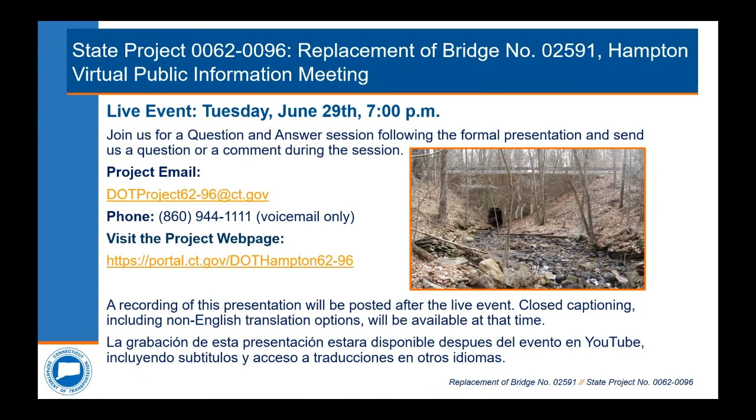My name is Kevin Blasi and I'm the project manager for the project being presented this evening.

On May 13th, 2021, our project team presented this project to Hampton First Selectman Alan Cahill. Along with the details specific to the bridge, we discussed the proposed detour and the project schedule. We also discussed the coordination that will be necessary with neighboring towns to ensure that quick emergency responses are maintained during the bridge closure period. Coordination with the town will continue as we advance the project through its design.

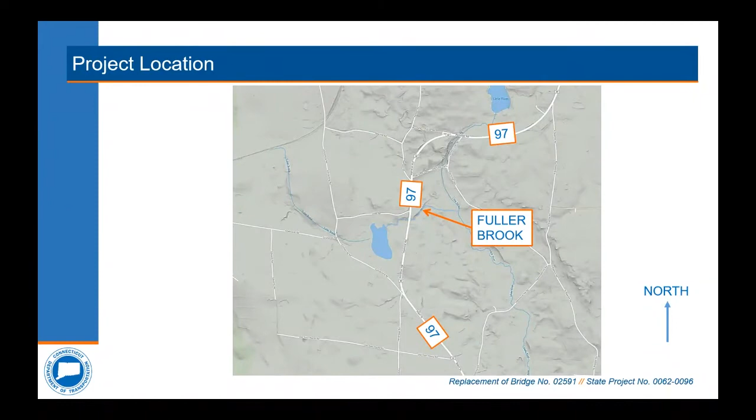Shown here is a topographic map of the area with north at the top of our screen. The bridge site is circled in orange, with important roadways and riverways in the area also called out.

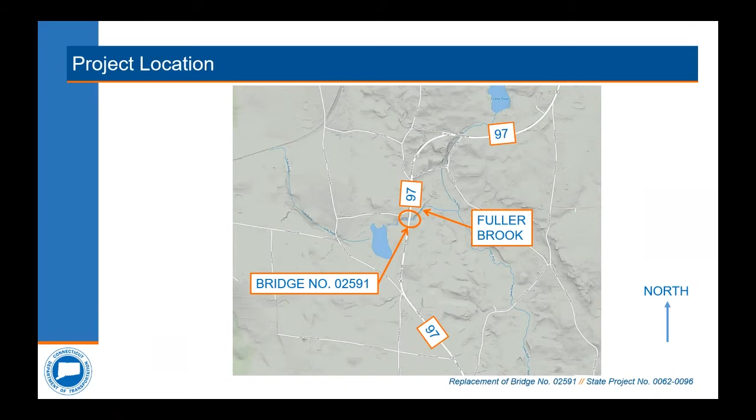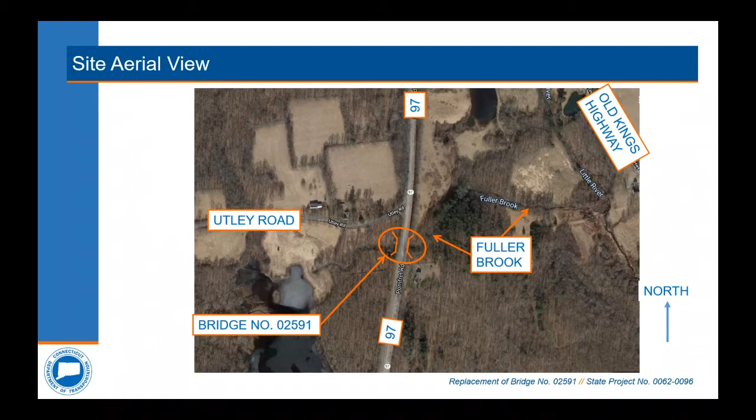Here we have the project site aerial view, again with north pointing to the top of the screen. You can see that we're further zoomed in to see the nearby features and roadways that make up our project site. Fuller Brook passes under our bridge, and Utley Road connects from the west to our north-south running Pomfret Road, otherwise known as the Connecticut Route 97 roadway.

The existing single-span culvert, otherwise known as a tunnel for a waterway, was built in 1935 as an 8-foot tall by 6-foot wide archway that was lengthened to the east at an unknown date. This culvert lengthening was due to raising as well as widening the roadway for various reasons. The newer part of the culvert is a 6-foot tall by 6-foot wide square outlet, which is built from masonry abutments with a concrete deck slab supporting the hillside above.

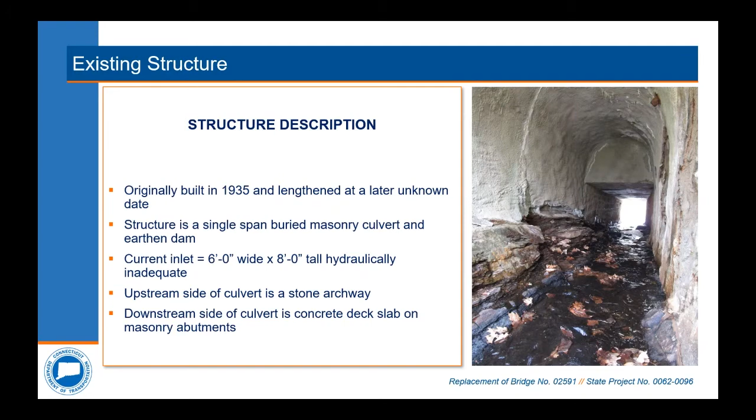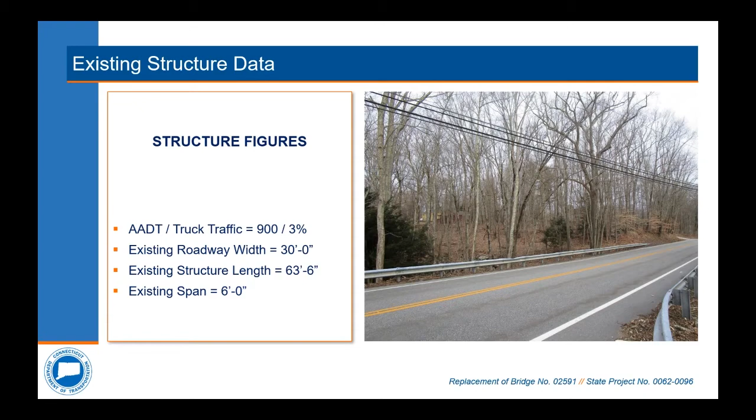The small culvert opening is not sized to convey the full flow of a 100-year storm event. The existing structure's span is 6 feet with a length from inlet to outlet of approximately 63 feet 6 inches. The roadway is about 30 feet wide and holds 2 lanes of traffic running north-south. The roadway serves approximately 900 vehicles daily, with around 3% of that traffic being trucks.

The state's bridges are inspected biennially to monitor changes in condition. The bridge was last inspected in February of 2021, and the rating system on screen presents the element ratings for the deck, superstructure, and substructure. These elements are rated on a scale from 1 to 9, with 1 being imminent failure and 9 being excellent.

Bridge 02591 is mainly comprised of 2 parts: the superstructure, which is the part that actually does the bridging from one side to the other, and the substructure, which is the part of the bridge that holds up the span itself. The superstructure is rated as a 4 of 9, which qualifies as poor, and the substructure qualifies as a 7 of 9.

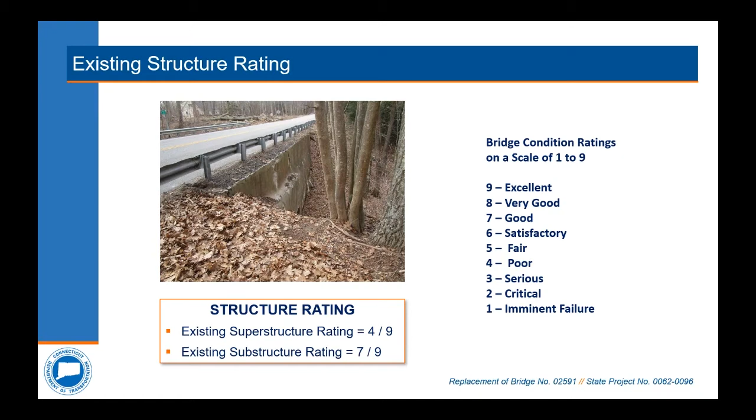Only when the bridge drops to a poor condition rating, 4, does it become a candidate for a rehabilitation or replacement project. We would like to clarify that the bridge is structurally sound and remains safe for all passenger vehicles and trucks at this time, and poses no safety concern to the public.

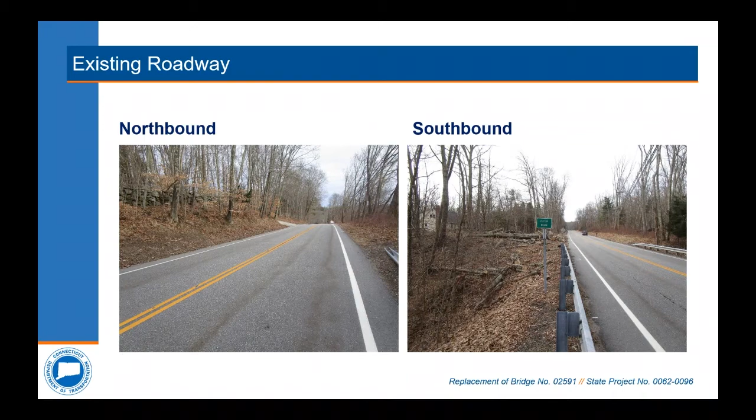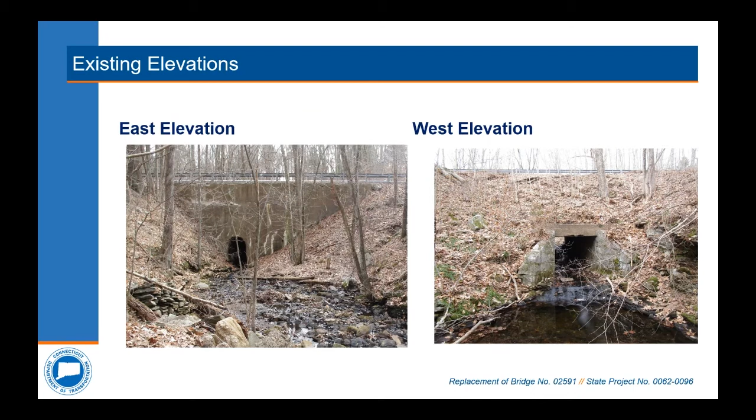The east elevation, shown on the left, is the inlet side of Bridge 02591. Note that the inlet is built into a large retaining wall that supports the roadway. The west elevation is on the right side of our screen, in which the outlet of the culvert dumps into a 3-foot deep scour pool seen at the base of the structure. This natural feature, as well as other structures in the waterway, both upstream and further downstream, inhibit fish movement in the area.

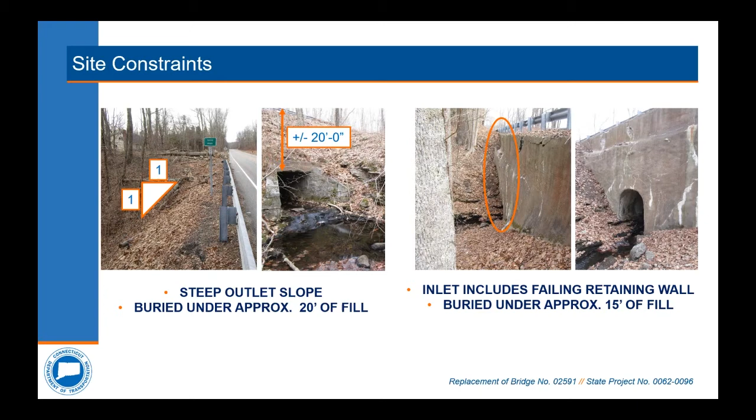This site is riddled with constraints, making the design a real challenge when looking at accessibility. The existing downstream culvert slope is at a 1-to-1 grade from the northbound travel lane shoulder down about 20 feet in elevation to the ceiling of our culvert outlet. On the inlet side, a heaving and non-square natural stone retaining wall buries the culvert with about 15 feet of fill below the roadway. The depth at which this structure is set, as well as the surrounding steep slopes in the area, pose a great challenge to the feasibility and constructability of this project.

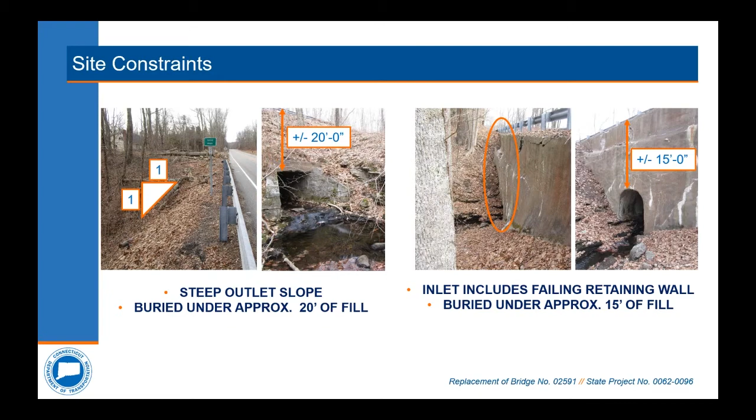The existing inlet retaining wall appears to be natural stone covered in shotcrete. The wall appears to be heaving and is covered in peeling shotcrete with major cracking throughout the face of the structure.

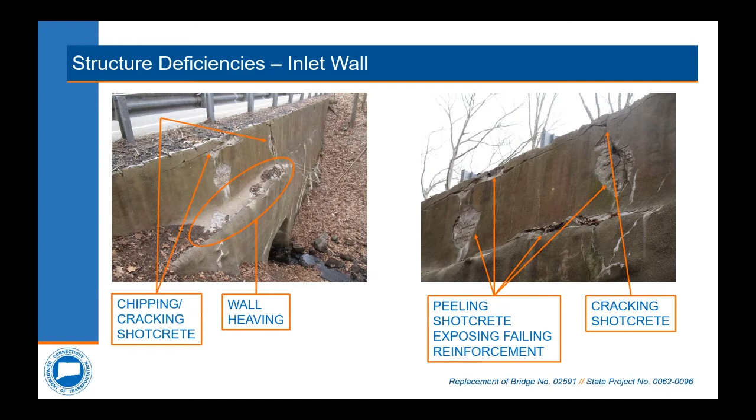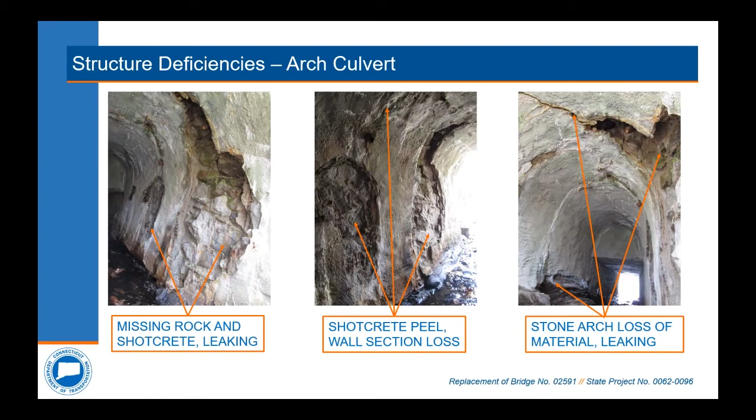At the base of our inlet retaining wall, the archway can be seen here, missing critical sections of material, thus allowing large amounts of water to leak into the culvert from above. This prolonged leaking further erodes away more of the structure as time goes on, making the archway weaker.

The newer frame downstream of the archway of the culvert shows evidence of scour underneath the abutments, which means water is eroding away at the base of the walls. The ceiling deck is also cracking and exposing rusted rebar.

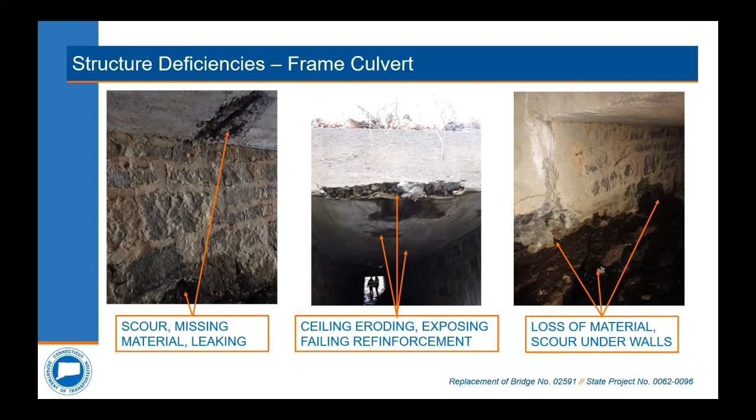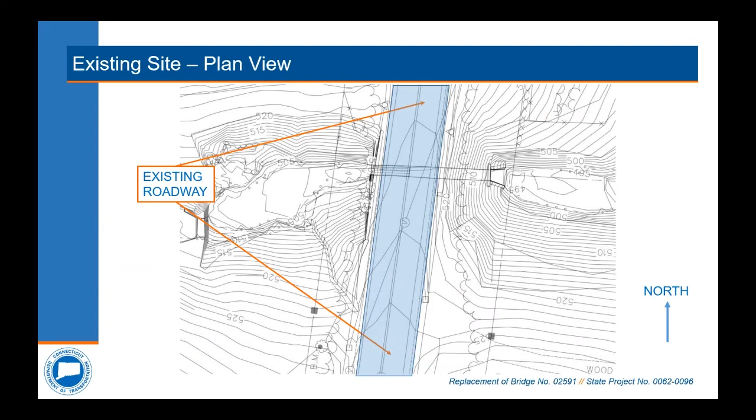We were able to obtain a 3D site model by completing a site survey. Running from north to south across the screen, we can see Pomfret Road here. On the left, or inlet side of the roadway, we can see the retaining wall highlighted here. Running perpendicular under that roadway is the existing culvert shown here.

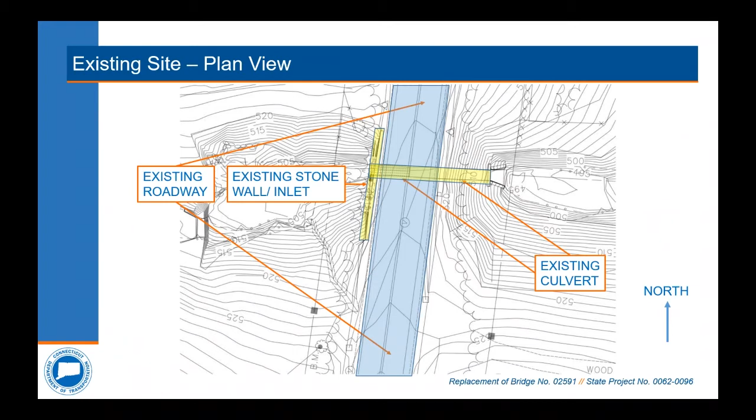At the end of the culvert, we have the outlet on the east side of the roadway shown here. The proposed conditions we intend to meet for the site are putting in a larger culvert that's slightly realigned and lengthened to better handle the stream load, as well as eliminate the need for a retaining wall on the inlet side to save cost on the project.

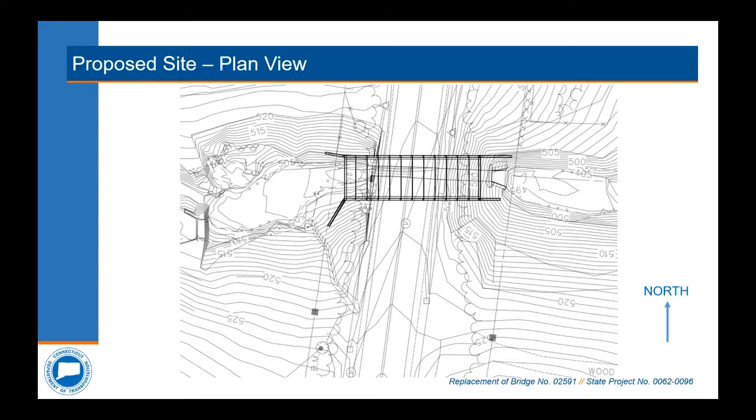The proposed culvert design is approximately 5 times the opening size of the current culvert and is shown here. We next aim to put in larger wing walls at both the inlet and outlet to act as retaining walls and hold back the surrounding hillside shown here.

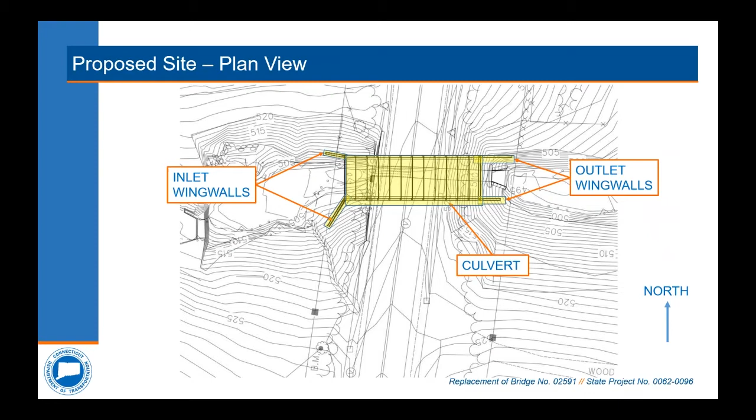We want to restore the roadway to similar conditions shown here that currently exist on site, but just have slightly larger shoulders along the roadway for safety considerations.

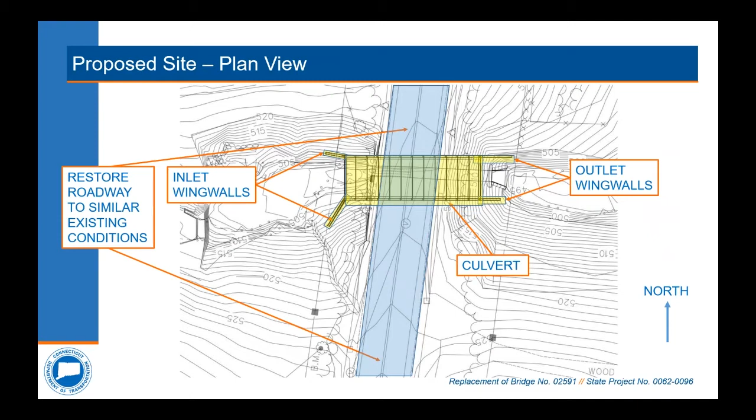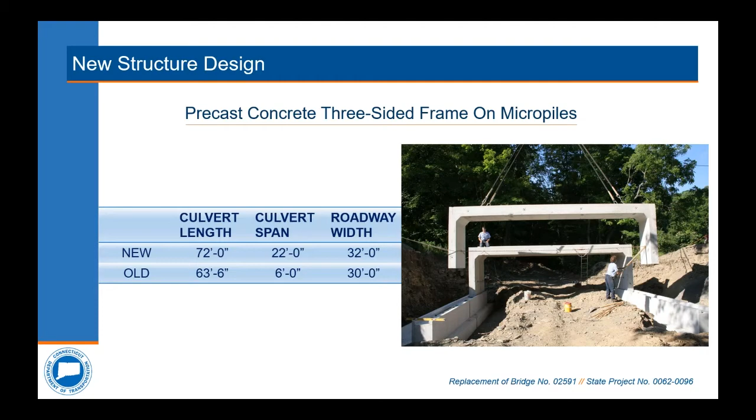It will sit atop a foundation made of micropiles and pile caps, which is a common foundation style for deep and rocky excavations like we expect to have with this design. The new culvert will be approximately 8 feet 6 inches longer and 16 feet wider than the original culvert.

In order to complete this project, we will need to temporarily move the overhead utilities to a location that will accommodate construction activities without conflict. There are no underground utilities that will require temporary relocation.

We also need to consider resident overhead utility relocation because an access road will be placed in the southeast corner of the site where a current residential utility hookup lies. The intended goal of the overhead utility relocation is to keep them all on one side of the bridge upon its completion for potential ease of future maintenance in the area.

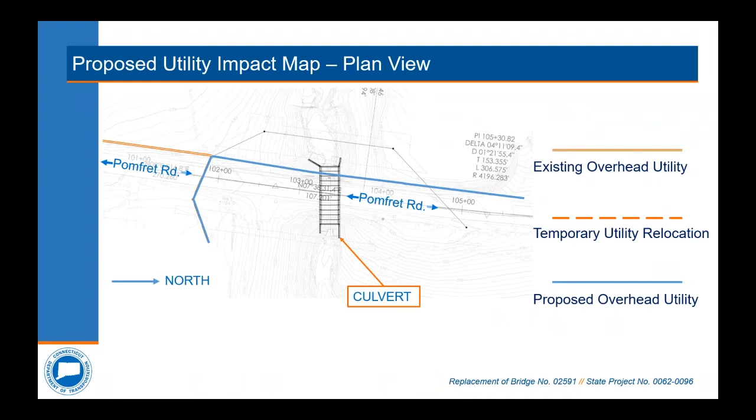While relocating these overhead utilities, it is clear that land outside of the state right-of-way will be required. Therefore, temporary and possible permanent impacts to private property will be necessary to complete this bridge replacement. The areas that are expected to be impacted are shown here and will need to be cleared of vegetation.

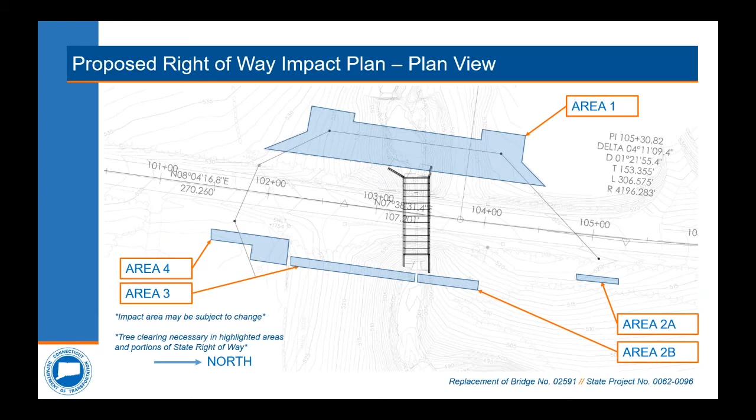I will now hand the presentation over to our DOT Rights-of-Way Coordinator, Matt Giannakopoulos, to help explain this acquisition process.

My name is Matt Giannakopoulos, and I am a project coordinator with the department's Division of Rights-of-Way. It is our office's responsibility to acquire the property rights needed for transportation projects. The proposed project design requires the acquisition of property rights, so I'd like to give a brief overview of the department's right-of-way acquisition process. Please keep in mind, though, that the specific impacts are still being fine-tuned and may change as the design progresses. Any property rights that will be required will be acquired in accordance with Connecticut General Statutes Sections 13A-73 and 13A-98E. Whenever there is federal money used in any aspect of a project, the department must adhere to the Uniform Relocation Assistance and Real Property Acquisition Policies Act of 1970, as amended.

Once the design has moved to the point where we are ready to begin the acquisition process, each affected property owner will receive a formal letter of intent to acquire from our office, along with a property map which depicts the exact property rights to be acquired.

At that point, our office will determine the fair market value of those property rights and use that value to establish an offer of just compensation.

That offer will be sent out to the property owner in writing, and a right-of-way agent will be available to meet with the property owner and explain the project, go over the specific impacts to their property, and explain the state's offer. The property owner will have a reasonable time, typically at least 30 days, to consider the state's offer and enter into negotiations. If an agreement is reached, the state will prepare all the necessary paperwork and record the deed and the property map on the town land records.

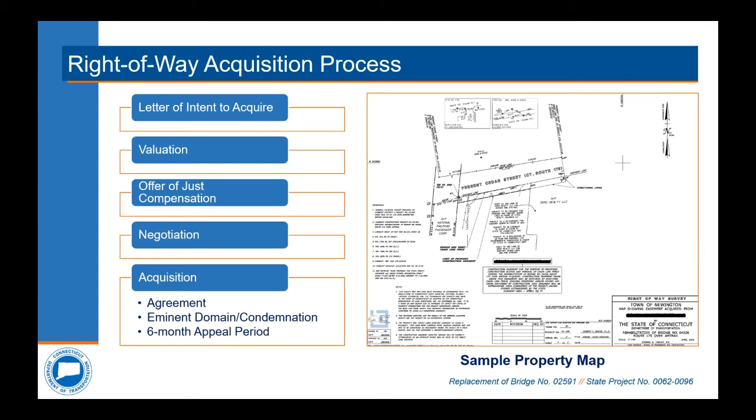In conjunction with the wall demolition, the culvert will also be carefully removed so as to cause minimal to no disturbance to our stream bed.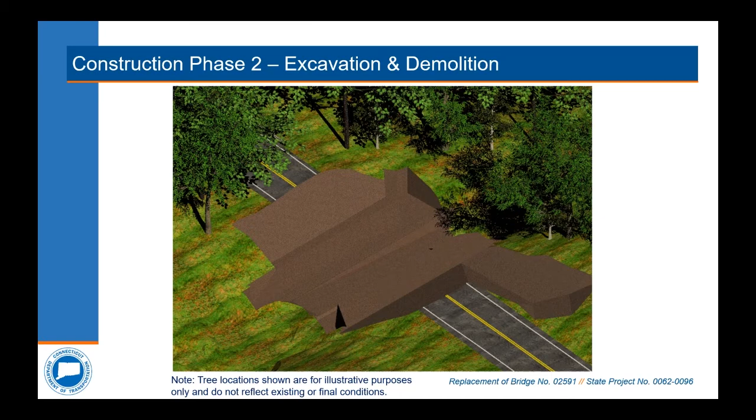Phase 3 is our construction phase of the new bridge 02591. After the excavation has been completed, all foundation elements as well as the culvert precast members will be transported to the site and with the help of a crane be hoisted into their new place.

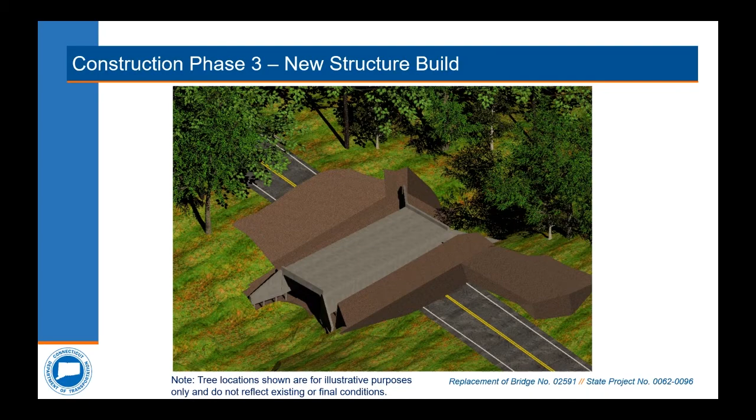The new culvert will sit a few feet higher than the original so that it will be closer to the roadway surface. This will aid in saving time when constructing the culvert as well as make future maintenance a smoother operation all around.

The new culvert will be backfilled after its installation. It's expected that some of the excavated soil will be suitable for reuse as backfill.

After the backfilling process of the site is complete, the utilities will be then relocated to their final condition as previously shown. Reconstruction of the roadway, planting of the site, installation of guide rail, and line striping will complete the project work. Upon completion of those tasks, the bridge will be ready to reopen for use.

Because of site constraints previously noted, it's not possible to keep traffic moving through the project site during construction of the new structure. As such, Route 97 must be closed to permit the necessary operations for the installation of the culvert. The proposed detour will be signed along state routes to minimize the use of local routes by through traffic.

It is expected that local residents will use local roads as a shorter route around the bridge closure. While the closure is in effect, local roads will not be signed as part of the detour. Our proposed detour is approximately 21.39 miles, mainly comprised of four roadways: Route 97, Route 6, Route 169, and Route 44.

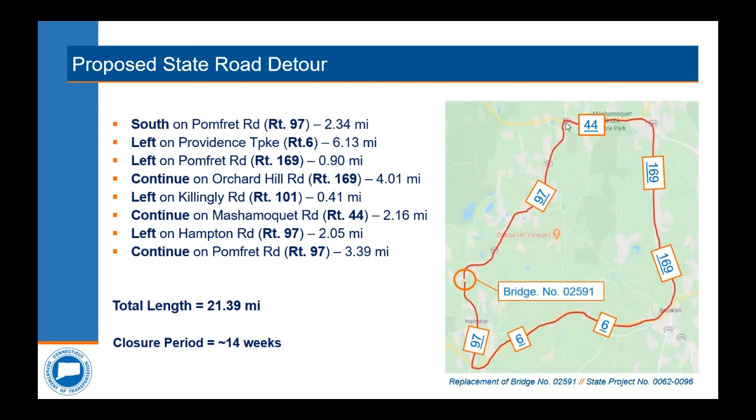So Jake, a question has come in by voicemail. Can you please run through the detour again? So here we have the detour map we are proposing. We have the bridge shown here in the orange circle. If we go south of the bridge, we'd go south on Route 97 down this way, turn left onto Route 6, and at the end of Route 6, turn left again onto Route 169 to go north, then come to Route 101 for a short distance and merge onto Route 44. At the end of 44, we'd turn left back onto Route 97.

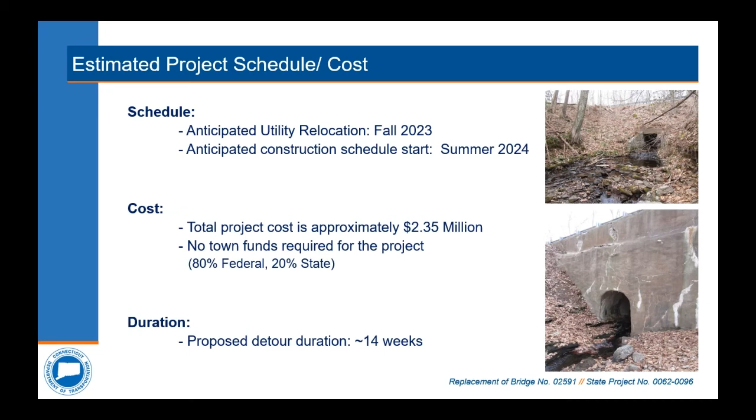Okay Jake, a question has come in by email. How long will the new bridge last? The new bridge is designed to last for a minimum of 75 years. Thank you.

Okay Jake, a question has come in. Can you explain again why the detour is necessary? Yeah. Let's go back one slide here real quick. As Andrew mentioned earlier in the presentation, the site on both sides of the culvert has very steep slopes, and the structure is buried beneath the roadway about 20 feet. These two factors together would require a substantial amount of excavation, as well as make it fairly difficult to stage this project to keep one lane of traffic at the site without a substantial additional right-of-way impact, as well as tree removal along Route 97. Staging the project that way would likely require two construction seasons. This equates to about two years to build the project, and the staging would likely double or even triple the project cost.

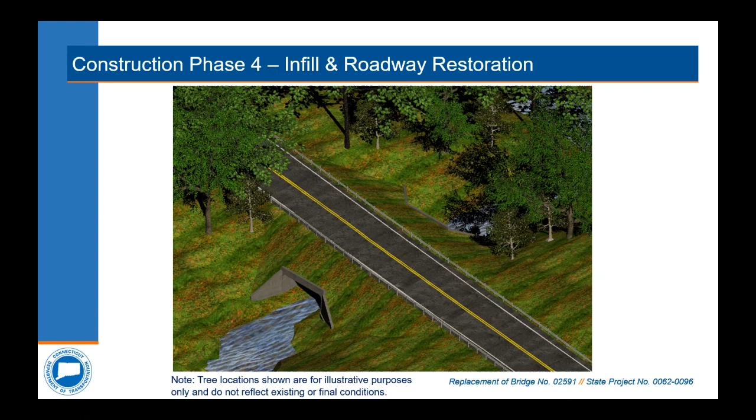Right. Thank you. Hopefully that answers our caller's question. And if it doesn't, please submit another email or question, and we can certainly address it again. Absolutely. Thanks, Andy.

So we'll give one last check of the voicemail and email, and I think we'll call it an evening at that point, if there are no further questions.